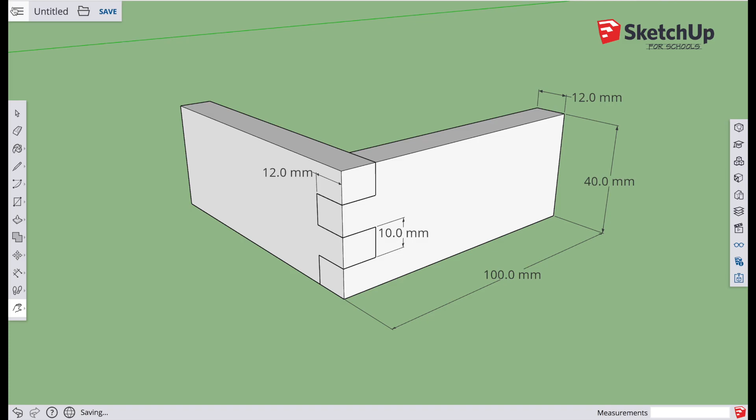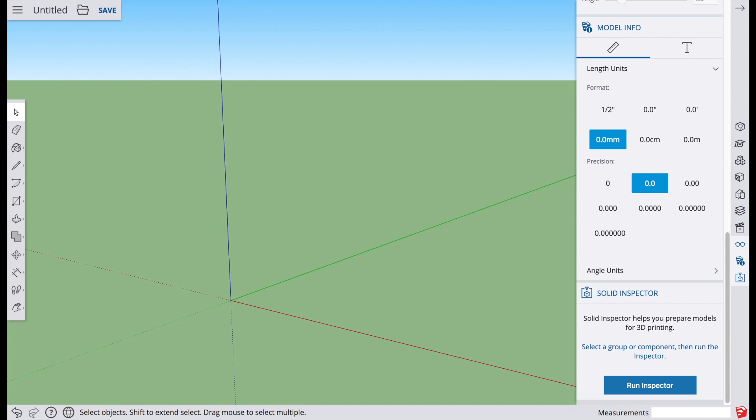Okay, as normal, let's get rid of our little person, and let's always again make sure that we have our measurements correct. So we are in millimeters, and 1 decimal place is fine. Now, unlike our previous tutorials, we're not going to try and simulate what we do in the classroom with the real equipment and wood. We're just going to try and draw this as quickly as possible.

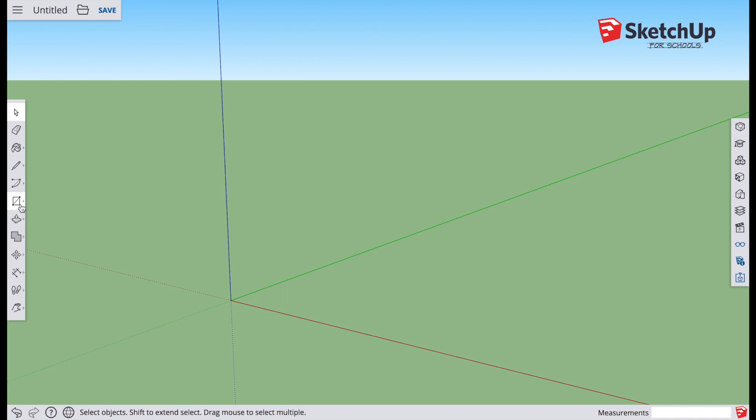So before we do it, if we just think about that joint, essentially what we have is two pieces that are actually the same, but because the fingers have to interlock, what we have is one that is flipped and rotated. So we can actually get away with just drawing one piece to begin with. So I'm going to start by just drawing a normal rectangle, and I'm going to draw it in its length at the moment.

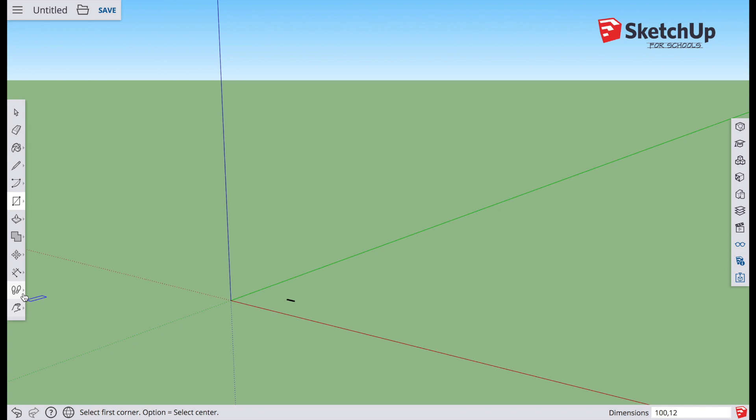So I need 100 millimeters in length, and I need 12 millimeters in width. So I'm going to type those measurements in down the bottom. There we go. So it's obviously nice and small, so that's fine. We're going to zoom in to see the whole model. Zoom out just a little bit and rotate for clarity. I'm now going to use my push-pull tool to bring it up to the 40 millimeters in width. And again, I'll just zoom out so I can see the whole model.

There we go. So this is my one piece, and I'm going to draw my finger joint down the end here. So in the classroom, I'd be drawing a 12 millimeter line down here and all the way around. Then I'll be dividing it up into four equal pieces of 10 millimeters. Again, those lines will be going all the way around, but we don't need to do that in SketchUp. We can do that just in a few quick movements.

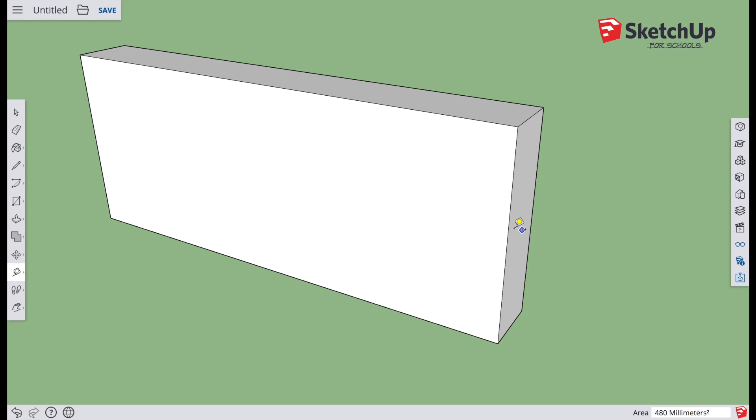So the first thing I'm going to do is I am still going to use a construction line to draw that 12 millimeter line down. But unlike, as I said, the real piece, I'm not going to draw this all the way around on all four sides. I'm now going to use another construction line to go 10 millimeters from this end. And I'm going to go another 10 millimeters again from that line. And lastly, 10 millimeters from that line.

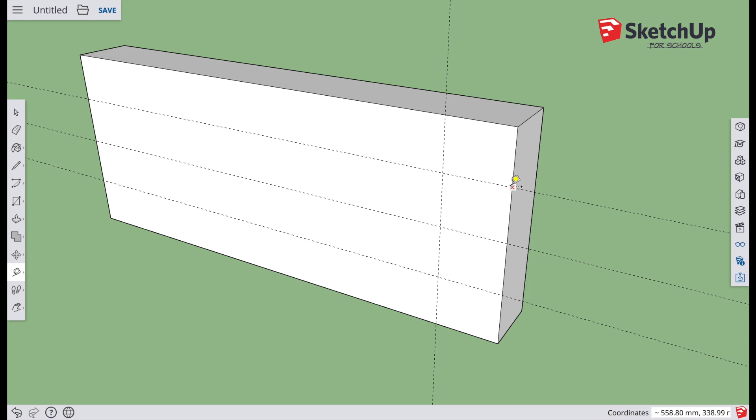So again, it's sort of like what we would do in class, but these lines are not going all the way around as well. So we can do this a lot more quickly. I'm now going to take my square tool again, and I'm simply going to draw a square in one section here, skip the next section, and then go to the next section here.

So essentially what I've done, I'm going to get rid of this section and this section, leaving these ones here as my fingers. And again, I would normally be drawing all these lines around, and then I'd have to go and cut them and use different tools. But again, the beauty of SketchUp, of course, is I can quickly take my push-pull tool, and these sections that I want to get rid of, it has to be the ones where I drew the square.

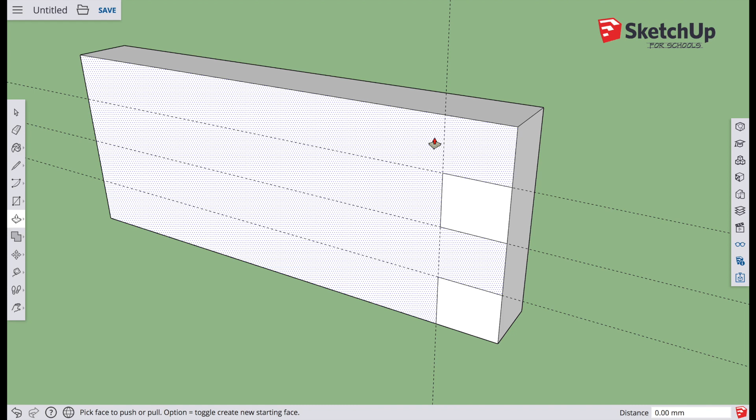If you notice, if I go here, this whole model selects. If I pushed and pulled here, I'd be affecting the whole model, which is obviously not what I want. All right, so it has to be these ones that I drew, these separate squares. So I'm just going to push them out. I'm just going to push it back to the line. You can see how it says on edge, because now that's going to disappear.

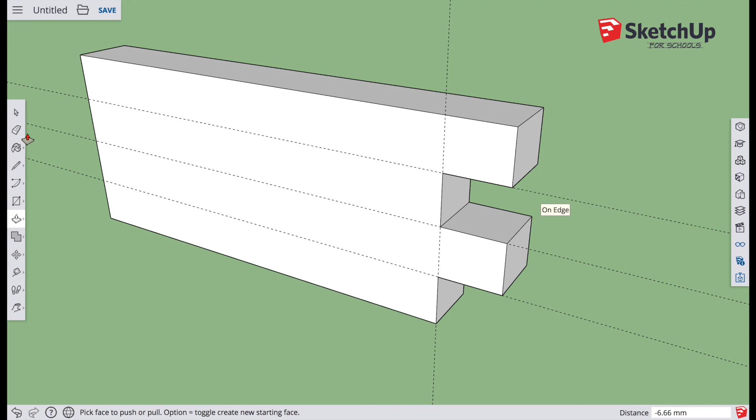So even if I went a bit too far or too short, if I accidentally did it wrong, if I pull it back to a line like that, it now has disappeared. So I've now cut out essentially these two pieces, leaving these two fingers. Okay, I'll just clean up my construction lines. I don't need them anymore, just with my rubber tool.

And as in most cases, I'll now quickly turn this whole section into a group so that I can move it around as one piece. So there we have one half of our joint.

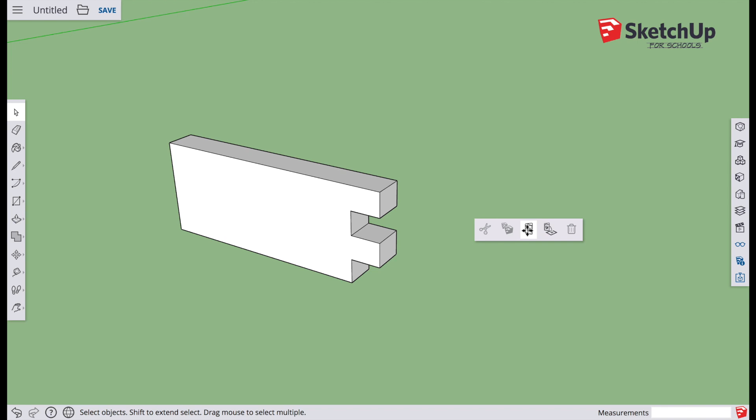So as we said before, because this is all done perfectly, it's not like the real world where we have slight anomalies. I can actually just take this entire piece and I can make a copy of it, pasting it over here. And all I need to do now is to flip this over so that instead of it being a finger at the top, it's now got this hole so they can join together, and also rotate it. Okay, so what I'm going to do is I'm going to do the rotate first, and I'll explain why I want to do that first in just a moment.

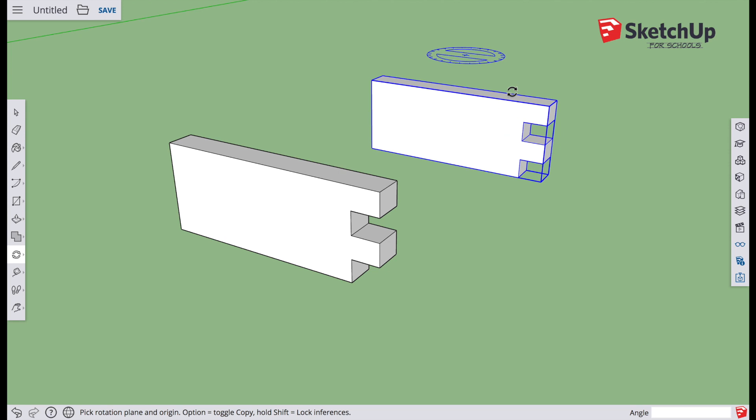So taking my rotation tool, and I want to rotate around this axis. So I'm just going to zoom in a bit more to see it. So I've got to make sure my protractor is facing on the blue axis in this case. I'm going to go from end to end, and I'm going to rotate it around. And it's exactly 90 degrees. I can either type that in the bottom right, as I can see there, or it's locking into place nicely for me. So I'm happy with that. Oops, try that again. There we go.

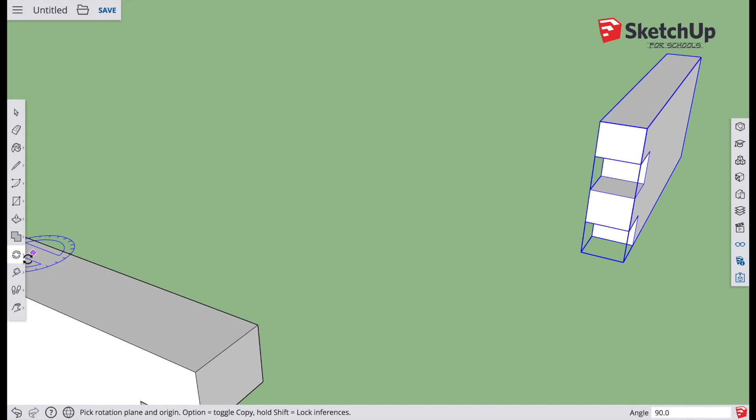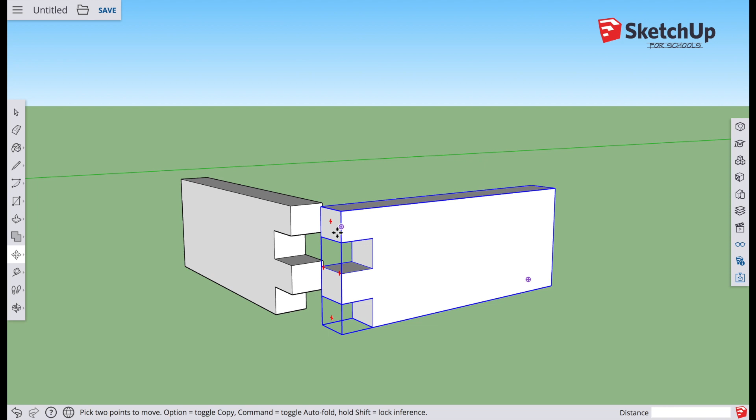I'm now going to take my move tool, and bring it forward. And I've deliberately not flipped it yet because I want to just show how this is the problem. If I don't flip it over, I've got fingers trying to join the fingers and gaps trying to join with gaps, and that's obviously not going to work. So now what I need to do is, of course, flip it as well. So I just wanted to really make that clear that we do in fact need to flip this piece over.

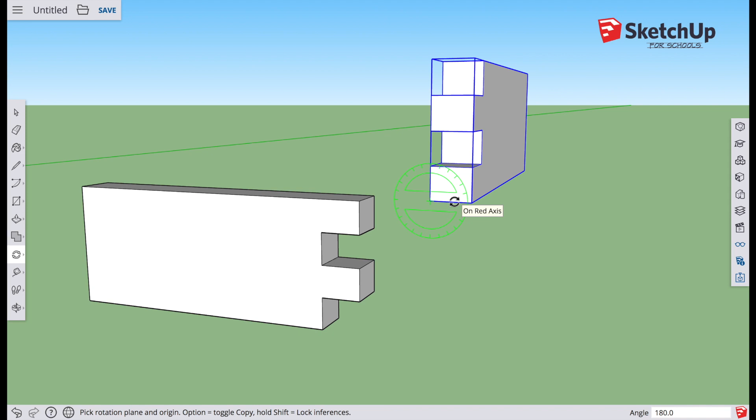So again, I'll take my protracting tool, and this time I want to flip it around the axis that way. So I'm going to do it from the side where I can see it a bit better. So from there to there. And as with before, I can either lock it in place or I can type 180 in to get an exact flip over. Whoop, missed it again. There we go. And now if I take my move tool again, it's now maybe at a different angle.

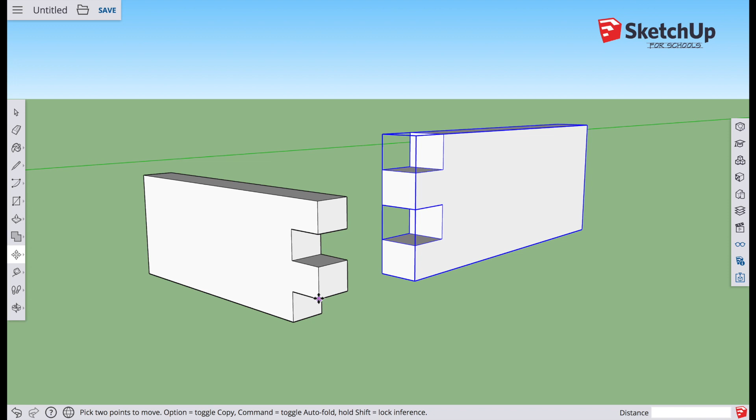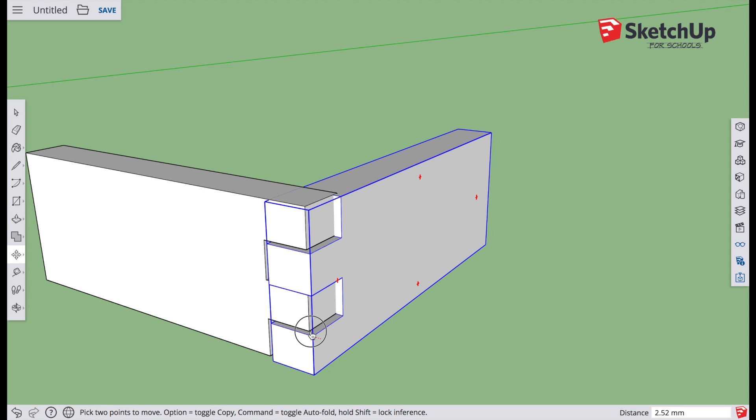It's now lined up in a way that I can take, say, a point, remembering points like to lock together. So if I take maybe this corner at the front here, that would lock in with this corner here. So if I use that as my reference points, I might be able to, maybe if I change direction a bit. Being a bit difficult. Here we go. As always, you just sometimes have to move things around to get the right angle, to get things to lock. And there we go, finally got it to lock into place.

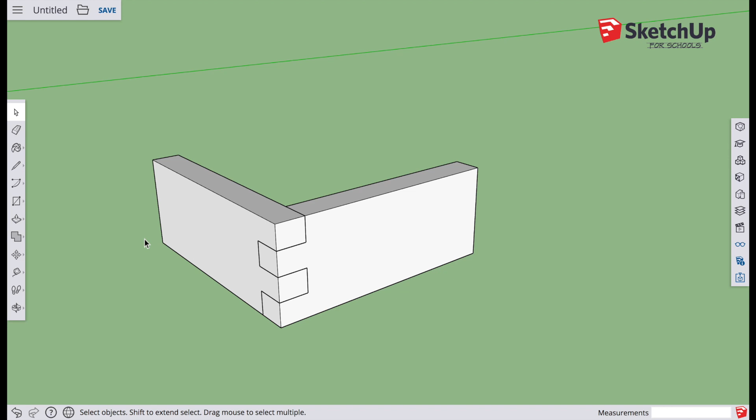So in essence, I've now just drawn my practice joint. I did it by just drawing one piece in actual fact, because it is obviously a duplicate for the other side, just flipped around as we talked about. Of course, in the real workshop, it takes a few more steps, and we don't have the luxury of just flipping a piece because we're not machines. We don't do things perfectly as we can do in SketchUp. But from a design point of view, there is absolutely nothing wrong with taking those shortcuts and taking advantage of the fact that we can draw things perfectly and replicate and make copies of pieces.

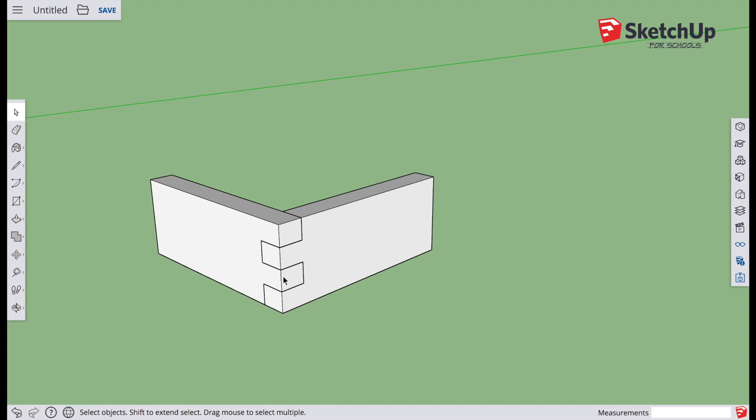So you should have been able to replicate this now. It would be good to include the dimension lines in a similar way to I showed you at the start of the video, and maybe even showing another copy of this where it's sort of blown apart to show how the joints are separate. So off you go, create your practice finger joint design.